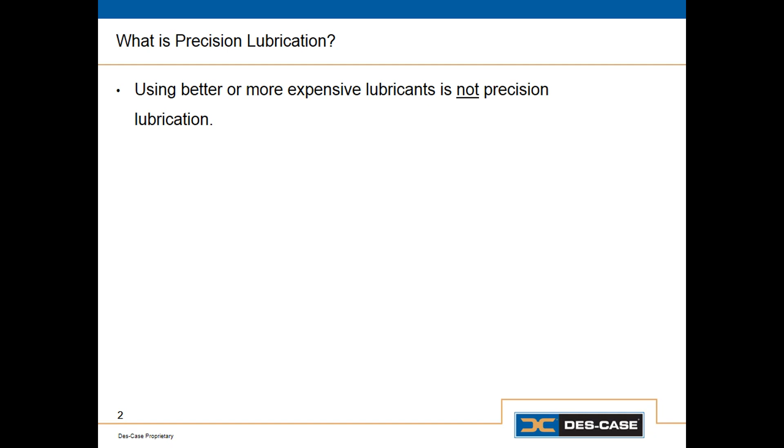So what is precision lubrication? Well, precision lubrication is not about using better lubricants. In fact, if you take the average machine, remove the average lubricant and replace it with the best lubricant money can buy, in most cases you won't improve much. Not to say lubricant quality isn't important, but in order to get value from quality lubricants, we have to do some other things right first.

Something else that isn't precision lubrication is just doing more of it. Lubricating things more often than is necessary is not only a waste of time and grease or oil in some cases, it can also induce harm. This is especially true for electric motors, where over-lubrication often leads to grease getting into the motor windings and causing a failure. Precision lubrication really requires a holistic approach.

It requires that we do a lot of things right. We have to get the correct lubricant specified. That's probably the first thing we need to do correctly—having the right oil or right grease in each application. We also need a good education program.

We need to make sure that technicians, engineers, the folks who are designing, implementing, or executing and managing the lubrication program understand not only the fundamentals of lubrication, things like lubricant selection, but also that they understand the implications of their actions. They need to understand the implications of adding the wrong grease or contaminating lubricants, etc.

We also need to optimize PMs. We need to make sure that all lubrication tasks are done at the most correct time and that they're done in the most correct way.

We need good contamination control. Even if we have the right oil in each application, if the oil's heavily contaminated, we're going to have excessive wear. In fact, lubricant contamination is the number one root cause of wear in lubricated machinery.

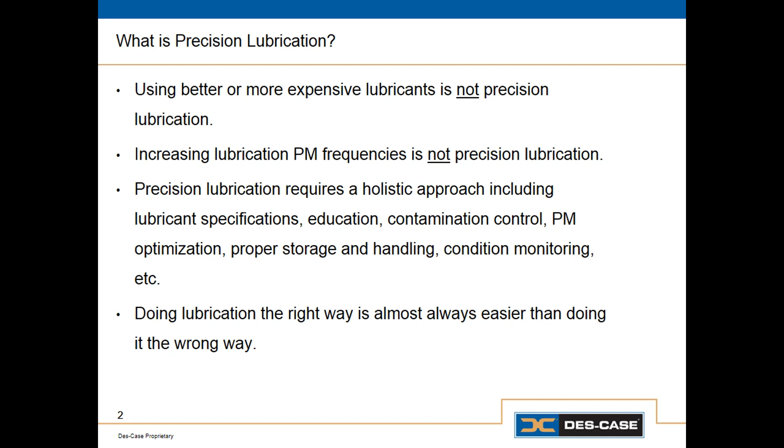And electric motors are no exception. For electric motor lubrication, doing things the right way usually means doing a lot less of it.

So precision lubrication for electric motors has 4 components. Product selection—we need to select the correct grease. We need to identify the correct amount of grease that's applied with each application, and we need to determine the frequency with which it should be applied. Lastly, we need to have a good, correct, and consistent procedure for applying that grease, so no matter who is executing this lubrication activity, it's going to be done to a certain standard.

So let's focus on the first aspect. Let's focus on product selection. Now, for electric motors, this is really easy because most lubricant manufacturers make a product called electric motor grease, or at least it's identified as being appropriate for electric motors. But the same grease, the same parameters apply to other high-speed bearings, not just electric motors.

So it's a good idea to understand not only which grease should go in the electric motor, but why. Why is that grease appropriate for electric motors? Most people misunderstand grease—they think of it in terms of the type of thickener it uses.

So they think of it as polyurea grease. In fact, if you ask a lot of folks what type of grease you should use in an electric motor, they'll say polyurea grease. Well, that's the thickener type. It doesn't actually say anything about the lubricating oil. The thickener doesn't actually lubricate anything—all it does is hold the lubricant in place.

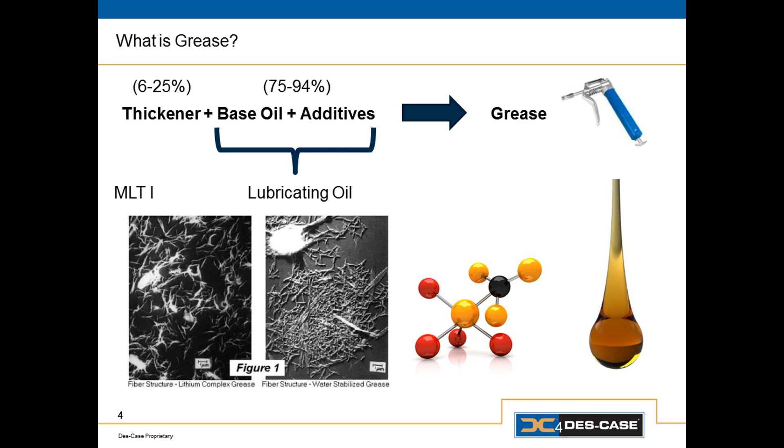The most important property of any lubricant, whether it's oil or grease, is the viscosity of the base oil. That's the first thing that we need to get right. It's the most important thing to get right.

When we're selecting a lubricating oil, we really look at two things: the base oil and its viscosity, and the type of lubricating oil or additive system that it uses. In the case of grease, we'll usually focus on EP or non-EP. In the case of electric motors, we're typically going to go with the non-EP, usually an anti-wear type of oil.

Once we've figured out what type of oil to use, viscosity grade and oil type, then we should look at what type of thickener is most appropriate and what NLGI grade or consistency is most appropriate. You could use a number of different thickener types for electric motor grease, but polyurea or lithium complex both have properties that make them suitable for electric motor lubrication. Again, the most important thing to focus on is viscosity.

So we're going to look at the actual process that we can use for identifying the most appropriate viscosity for not just an electric motor bearing, but any anti-friction or rolling element bearing.

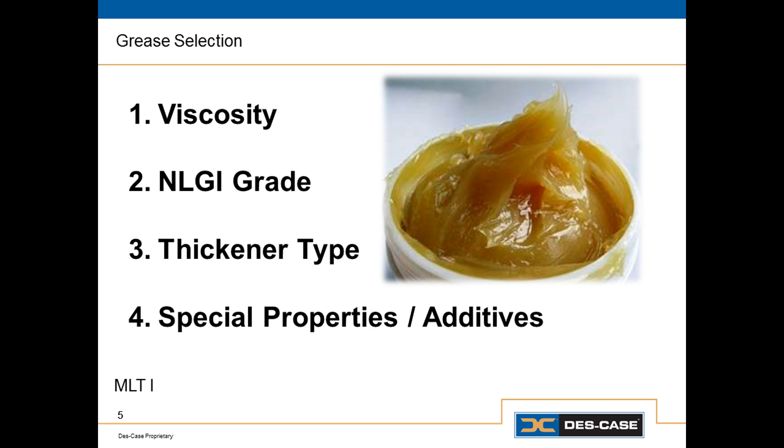The first step in the process is to identify what we call the minimum operating viscosity. That is the actual viscosity of the oil at the operating temperature that is required to create a thick enough oil film to prevent metal-to-metal contact, or to overcome the surface roughness of the interacting surfaces.

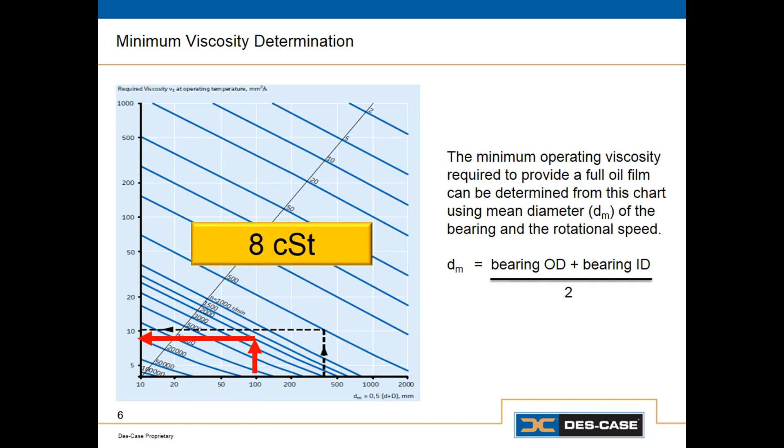This multiple of minimum viscosity is referred to as the kappa value. The kappa value is simply the ratio of the actual viscosity of our oil to the minimum required viscosity of the oil. So for slow speed bearings, a lot of times we'll have a kappa value of less than 1, which means we do have, or will have, metal-to-metal contact.

The reason for this is that with slow speeds, it's not as important to have a thick oil film, but also it's just impractical in a lot of cases, because using that much viscosity would require additional lubricants and inventory, etc. For high-speed bearings such as those in an electric motor, we typically want to use a good bit more than the minimum. If we use a kappa value of 1, that would be the bare minimum.

That would be our minimum value of 8. If we use a kappa value of 2, that would be 16. Optimum bearing life is achieved when we have a kappa value of 4.

Now there are reasons we would want to use a little less, and reasons we might want to use a little more. With oil lubricated bearings, especially if we have good contamination control and consistent temperatures, we might want to get closer to 1, maybe 1.5 or 2. But with grease lubricated bearings, where we don't have very much control over contamination and operating temperatures can fluctuate a good bit, we usually use a little more.

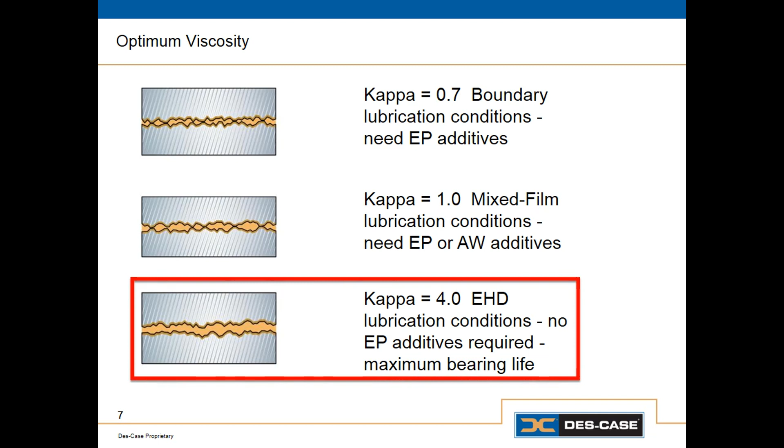So in this case, let's just assume we've decided on a kappa value of 4, which is most appropriate for our particular motor bearing. If we take our minimum viscosity of 8 and multiply that by our kappa value of 4, that gives us a target or optimum viscosity of 32 centistokes. So our next step is to figure out what viscosity grade will give us 32 centistokes at our operating conditions.

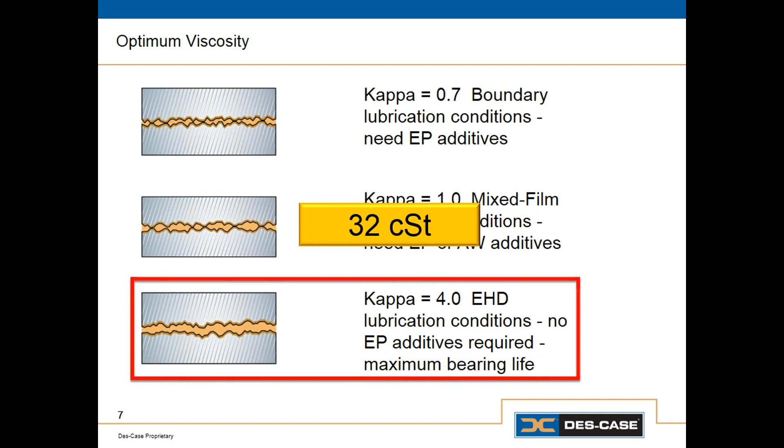Operating conditions in this case really means operating temperature. Now we don't necessarily know the operating temperature of every electric motor. Moreover, if we were to go out and measure it, it can change day to day depending on the ambient environment. So we want to focus on the highest likely operating temperature. In our case, let's say we've assumed that to be 75 degrees C.

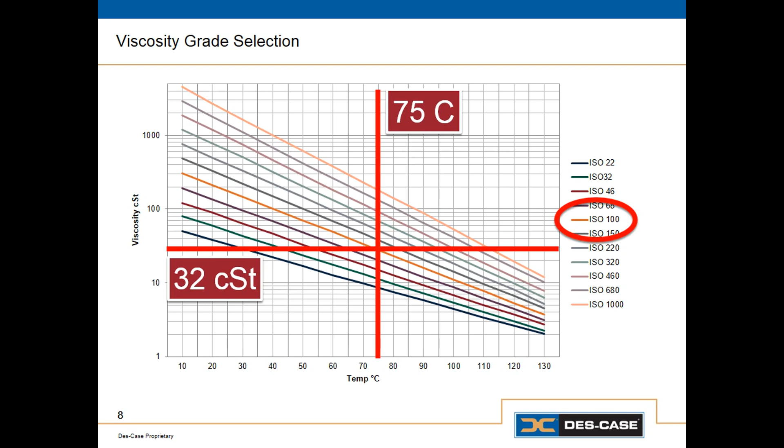Now that we've decided what kind of grease to put into our motor bearings, we need to figure out how much should be in there. There are really two answers: how much we should put in initially, and how much we apply when we replenish the grease. We want to start out with not the ideal amount, but as much grease as we can put in there without causing any harm.

For very slow speed bearings, this means filling the bearing housing completely full. For higher speeds, we want less grease, because the faster it turns, the more that extra grease harms us—it takes more energy to push through, resulting in elevated operating temperatures. So the faster it goes, the less grease as a percentage of volume we want to use.

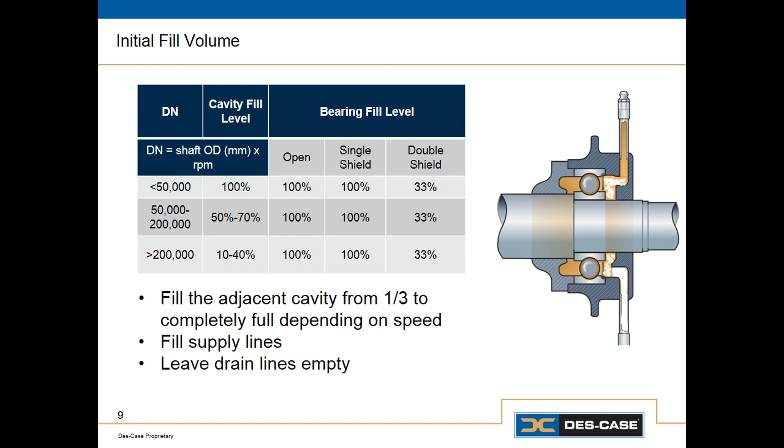Most electric motor bearings fall into the middle range of speed factors, 50,000 to 200,000. So if we have an open bearing or a single shielded bearing, we should initially pack that bearing completely full, then leave the space around it partially empty—filling it 50 to 70% full. That way, when the machine starts up, the extra grease in the bearing has somewhere to go.

It'll get slung out, and it'll basically come to equilibrium. It'll find where it wants to be in terms of how much grease is retained inside the bearing.

Now for double shielded bearings, it's much more difficult, if not impossible, for that grease to get out. So in that case, we want to start out with the ideal amount of grease inside the bearing, which would be about a third full. And then the space around the bearing we want to fill to the same specifications, about 50 to 70% full.

Now there's two other considerations for initial fill. One is in a lot of electric motors we have to use an extension on the fill port in order to get access to it because of coupling guards and things. So when we install that extension, we want to make sure that we pre-fill that with grease so that when we replenish grease, that's not going to be a factor. It's going to automatically start applying that amount of grease. Otherwise, it might take several applications to actually fill that pipe extension. So we want to make sure we start out with that full.

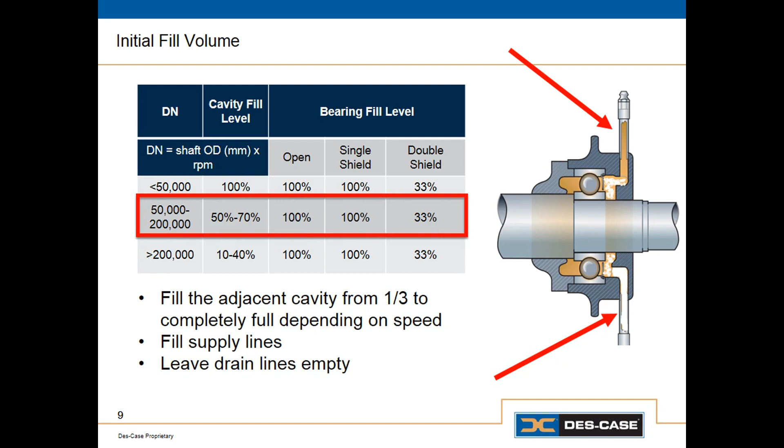And then if we use an extension on the relief fitting on that electric motor, we want to make sure that that is empty. Now, even with doing that, there's a decent chance that the grease that makes its way into that tube is going to harden over time and cause problems. But by leaving it empty to start with, we're going to have the best chance of it actually working properly going forward.

So that's the initial fill, and that's easy. The thing that we're going to do much more often is figure out how much we apply ongoing when we replenish that grease. Over time, the grease in that initial fill is going to get, in some sense, worn out.

So the oil is going to separate from the thickener, some of it's going to evaporate, some of it's going to run out, and the grease is going to start to become dry. As that happens, our lubricating film will start to dissipate. So we need to replenish that grease from time to time.

The amount that we use in most cases is just going to be a function of the size of the bearing. So we take the outside diameter of the bearing in millimeters and multiply that times the width of the bearing in millimeters, multiply that times 0.005, and that is going to give us the appropriate replenishment volume in grams.

Now, of course, we can use different dimensions. We can use inches, and we can multiply those times 0.114, and that's going to give us the appropriate replenishment amount in ounces. So again, this is pretty straightforward, pretty simple stuff. We start out with this amount. This is the amount that we apply when we replenish the grease.

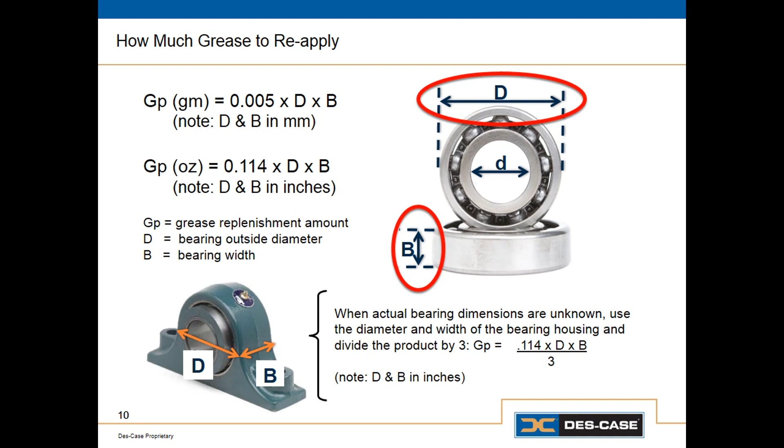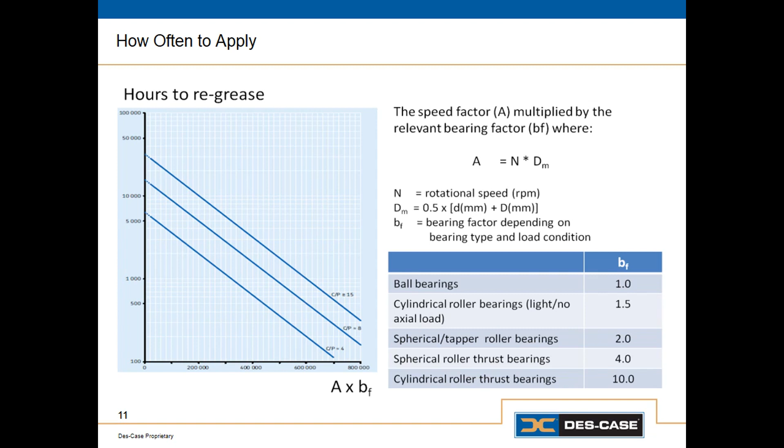So we're going to have to calculate a few things. If you look at the x-axis on the chart here, you'll see A times BF. That A is the NDM speed factor. So to calculate the NDM speed factor, we multiply the rotational speed times the mean diameter. We'll go back to our original example and use 100 millimeters as our mean diameter, and we multiply that by our rotational speed of 1800 RPMs, and that gives us 180,000. That's our NDM speed factor.

Now notice there's one other factor there, the bearing factor, or B sub F. That is an adjustment or correction for the type of bearing that is used. Different bearings allow grease to last different lengths of time or different service lives. So ball bearings, grease in a ball bearing has a very long service life. Grease that's in a spherical roller bearing has a much shorter life, or a tapered roller bearing. And this has to do with the amount of contact. Basically, the contacts in the bearing squeeze the oil.

Out of the grease, the more contact there is, the more of this effect we're going to get. So with ball bearings, we have a very long grease life, so that gets a factor of 1. If it was a cylindrical roller bearing, as some motors do have, we'd use a factor of 1.5.

In this case, it's not going to change the value on the x-axis. It's 1800 times the mean diameter of 100, times a bearing factor of 1, gives us 180,000.

So we go down to the x-axis and follow the line from 180,000 up to the line that reflects the appropriate load ratio. In this case, we'll assume the load ratio is approximately 8, which is the middle line. So if we go up to the middle line to 8 from 180,000, and then track over to the y-axis, this gives us our recommended relubrication interval in operating hours.

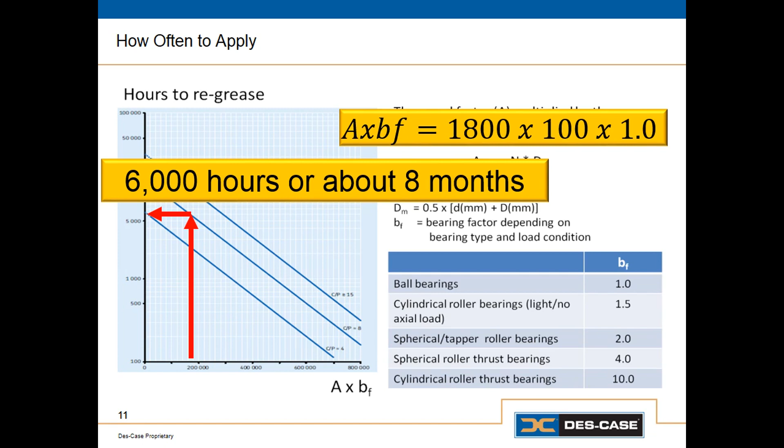Now we can make some adjustments to that. We should look at that value as the starting point, or default value. We may want to make adjustments based on certain operating conditions like temperature. Some of these things we can quantify, some are more subjective, like moisture and particle contamination. Those really aren't going to apply so much to electric motors—at least hopefully we don't have too much particle and moisture contamination in our electric motor bearings. So let's focus on the ones we actually can quantify.

For temperature, we want to reduce the interval by half for every 25 degrees Fahrenheit above 150. So if we said 6 months, if we were operating at 175 degrees, we'd want to do the same thing every 3 months. Some of the other things we can quantify are things like the orientation of the bearing.

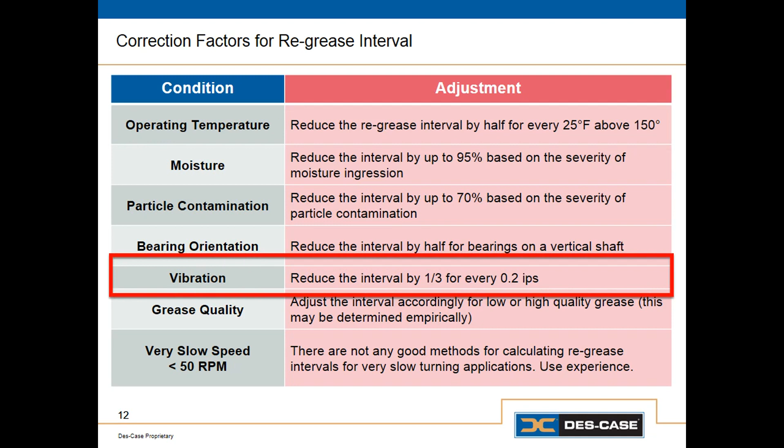If this motor happens to be vertical, we want to lubricate that twice as often as well. So any bearing on a vertical shaft needs to be greased twice as often as one on a horizontal shaft. And then also vibration—the higher the vibration, the faster the grease separation, the faster the grease gets used up or consumed. So if you want to put a number on it, for every 0.2 inches per second, we want to reduce our interval by 1/3.

In this case, we really don't need to collect very much information to make these determinations. We simply need to know the frame size of the motor, the rotational speed, and be able to characterize the service condition as standard, severe, or extreme. In the recommendations, this OEM makes a much clearer explanation of standard, severe, and extreme. But just to put it in the simplest terms, standard would be like 8 hours a day, 1 shift per day. Severe would be 24/7, and extreme would be 24/7 with high vibration, high temperatures, etc.

So it's kind of hard to put a fine point on it, but again, these are just approximations. So as long as we're in the right range, we should be good. For grease relubrication frequency, depending upon the motor size, it's going to be somewhere from 1 month to 12 months—that's a pretty big range. But if it's a large motor, 404 to 449, it's going to be probably 6 or 3 months, depending upon the conditions. And the same conditions are going to apply to most equipment in the plant.

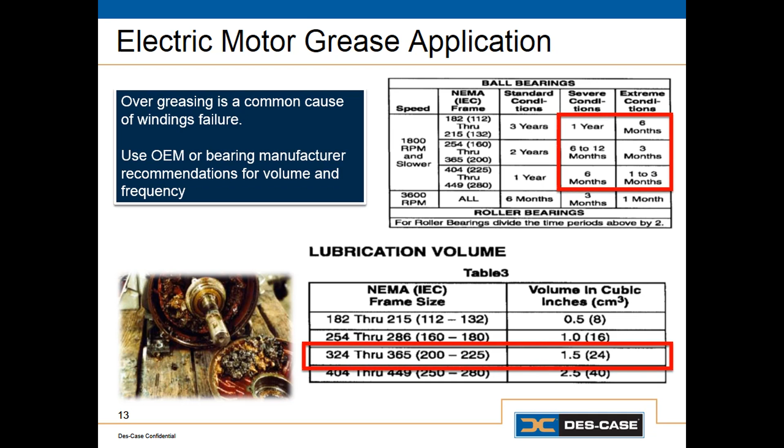Now, we're not quite done. Once we've determined the amount of grease that goes in and how often we need to apply it, when it comes to actually developing lubrication PMs, we need to be able to express this. We need to communicate this to the technician in terms that are easy to interpret. And if you're standing out in the plant holding a grease gun and you have a PM sheet that says apply 17 grams of grease, not everybody knows exactly how to get 17 grams of grease out of any grease gun. We usually want to describe grease amounts in terms of shots.

It's 7 shots, or it's 10 shots, or it's 5 shots. But we really need to define what a shot is, because different grease guns can have different answers to that question. Grease guns can range anywhere from 5 shots per ounce to 45 shots per ounce, or even higher, depending upon the type, make, and model. So there's no magic solution for this, but we are going to have to address it in some way.

And there's really 3 different ways to go about it. We could either use a standard type of grease gun for the whole plant, so everybody uses the same make and model of grease gun. It's got a known output ratio, ounces per stroke or whatever. And using that knowledge, we can specify how many shots of grease for each application. That's not practical for everybody.

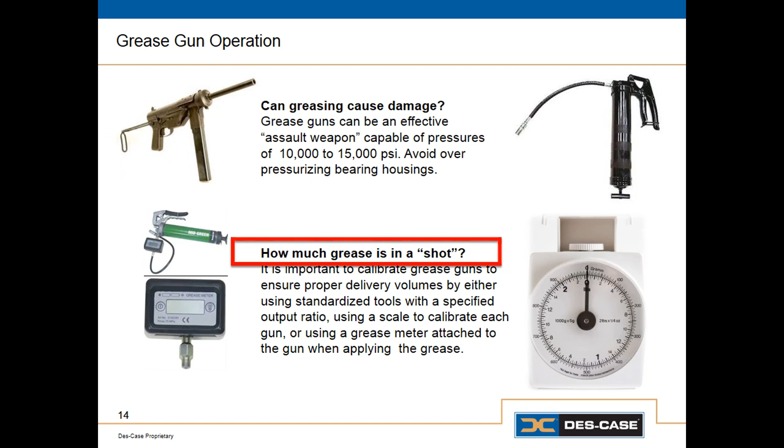We could take each grease gun and weigh out a shot of grease and see how many shots it takes to make a gram, a cubic inch, an ounce, or whatever units you want to use. That can be somewhat challenging because we have to do a little math along the way. Or we could simply use a meter attached to the grease gun that tells us exactly how much grease comes out. Obviously, this is the better choice in terms of accuracy and reliability. This is going to take all the guesswork out. So that would be our standard recommendation.

So now that we've decided what grease we're going to use, how much, how often we're going to apply it, and how we're going to communicate that, we need to decide what the most appropriate method is for applying that grease. And there's no one right way. Some of these things are optional. We may or may not want to do all of the things in the procedure listed here.

Like the first step. Okay, the first step in this procedure is to remove the vent plug. There are advantages to doing this, but there are a lot of cases where it's not possible because it's inaccessible, or it may just be impractical. It may be inconvenient to remove the vent plug from a motor bearing.

If we add the correct amount of grease at the correct frequency, there should be no significant need to purge old grease from the bearing. If we use the right amount at the right frequency, it should take many years before old grease becomes a problem. So this notion of purging electric motor bearings is, in my opinion, way overrated and not necessary if everything else is done correctly. Nonetheless, it is helpful to do. It is a best practice.

So when we can do it, when it's convenient, it's a good idea. In our procedure here, we're going to go ahead and remove the vent plug if we can. The next step is not really optional, and that is to wipe the grease fitting. That is really the extent of our ability to control contamination in a lot of grease lubricated components: simply wipe the grease fitting, then purge a bit of grease from the grease gun nozzle and wipe the nozzle as well. That's as much as we can do, and there's no reason not to do it.

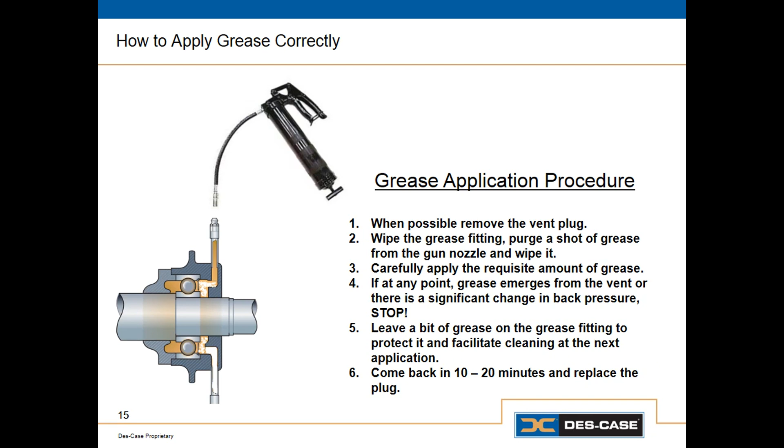As the actual last step, if you did remove the vent plug from the bearing housing, you want to wait 10 to 20 minutes before you replace it. A lot of times when we add grease and we've removed the vent plug, no grease comes out initially, but if you wait 10, 15, or 20 minutes, some of that grease does come out once it warms up and starts to move around in there. So it's a good practice to wait before replacing that plug, and you can go on and do other activities, like greasing the next few motors, before returning to replace those.

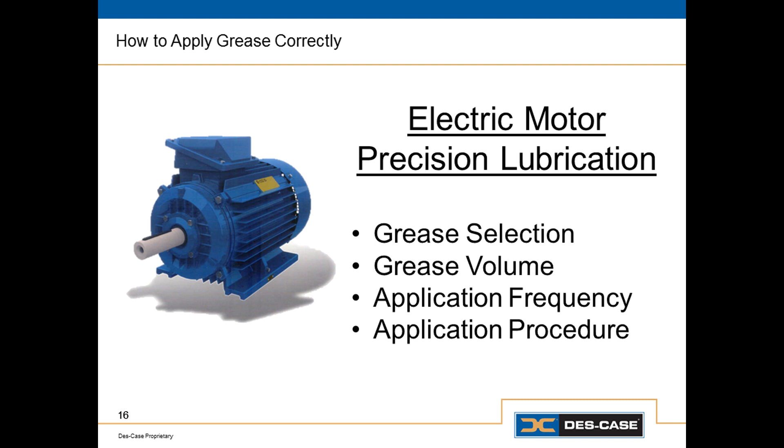So essentially, that is precision lubrication for electric motors. It's a huge opportunity for most plants, and something most people don't get right, at least initially, but it can be simplified if we do four things using a valid approach or recognized authority. First, select the correct grease, either by following standard methods or going to the equipment manufacturer or lubricant supplier for a recommendation. Then, determine the most correct amount and frequency, again from multiple sources, as long as we're not just guessing. All we need is to get in the right ballpark; it doesn't need to be exact. Finally, we need a correct and consistent application procedure that we can train on, so all technicians apply grease the same way every time. This way we can begin to measure the effects of precision lubrication on electric motors and our other grease lubricated bearings as well.